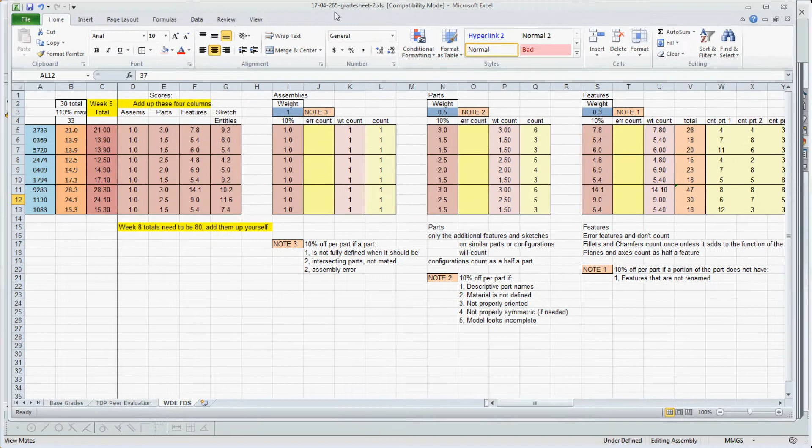So this is the grade sheet. This is what we're going to be looking at. So if you look at the base grades, here are base grades. And what you want to do is go over here to the WDE FDS section in here.

What I'm trying to do is make this as easy as I can, but as fair as I can too. And what I'm grading you on over here in these 4 columns are assemblies, parts, features, and sketch entities.

And for week 5, these are the values you got. And for this week, for week 8's evaluation, we want to make sure we hit 30 points. So some of you are like 2/3 of the way there. You just need to add more stuff. You need to add more assemblies. If you want to do a sub-assembly, if you think it's appropriate, you can do that. Parts, you could add more parts to it, more features. And over here to the right-hand side are sketches.

So I made it so you could actually see these over here. And this column over here is actually just a maximum. So if you exceed like maybe 36 over here, if we already put in for this person's part, he actually had 91 sketch elements in that one part. That actually bumps up quite a bit, so that makes that 36. Capping it off at 10%, so it's 33.

So there's 6 parts. I only counted the first 6 parts in here, and he made a lot of sketch elements in here. And with 6 parts, he was actually able to get that score that we're trying to achieve for this week. With the 6 parts, each one of those parts had 8, 8, 8, 7, 6, and 10 features for each one of these parts.

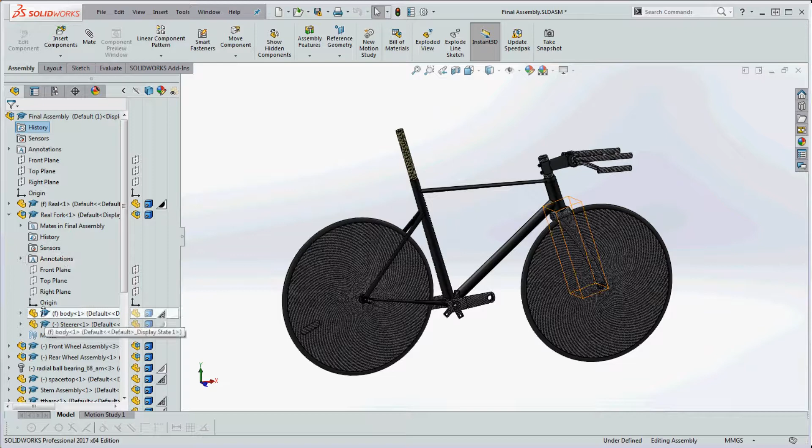We're going to count that as part number 1. We have a sub-assembly right away, but if that were a part, the real fork, we'd count that as the real fork. The real number 2 part is going to be this body and a steerer, as you call it - I suspect there's probably a better word than that. That's going to be part number 2 and 3.

In this other assembly, we have what looks like 1 part, 2 fasteners, and then another part. Fasteners are going to count as half. So we're going to count those, and so on and so forth. That's how parts are counted.

If we go back to the grade sheet and take a look at that, we have our parts over here. Ultimately, we're going to get down to the bottom of our assembly, and we're going to go ahead and count all the parts and put that here.

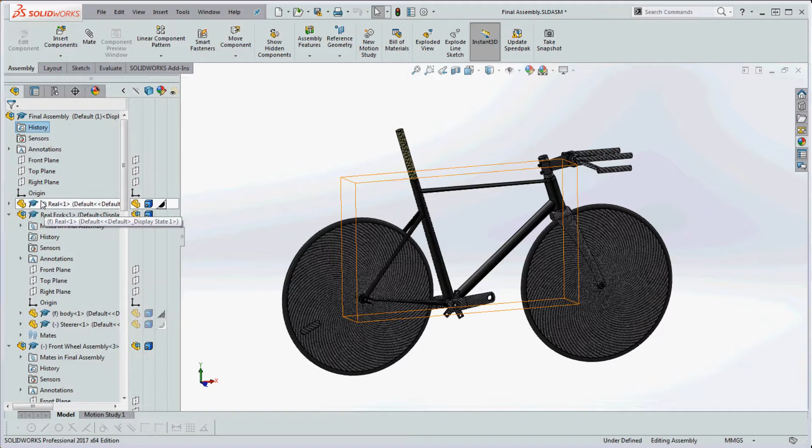So what's next? Next are features. Let's go back to our model and take a look at our features. We're going to dig into this a little bit - maybe take a look at this one over here, our part number 2. Let's open that up, and now we're going to count the features.

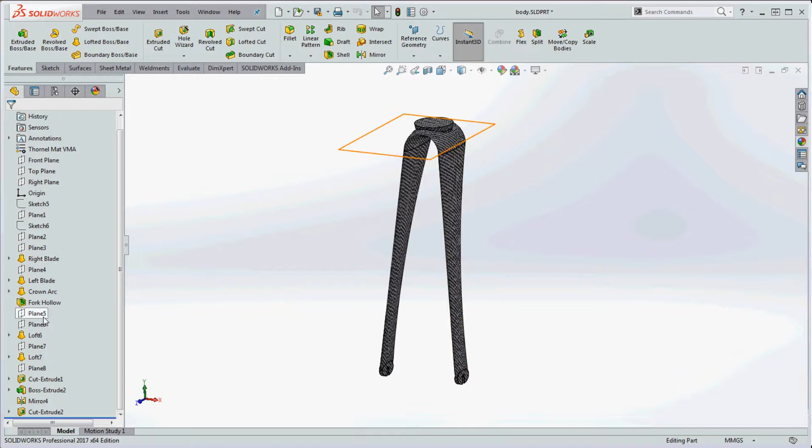We can count the features inside the feature manager tree of the assembly, but this is just as easy too. So we're going to start counting features. After the origin, we're only going to count planes as half, because they're used there as kind of reference geometry. We have 1, 2, 3, 4, 5, 6, 7, 8 planes - that makes 4 features, we're going to divide that by 2. Then we have a right blade, left blade as loft features, and so on and so forth.

So that we have 4, 5, 6, 7, 8, 9, 10, 11, 12, 13, and 14. So we have 14 features for our part number 2.

Now if we had a fillet in here, I'd count that fillet just once. If we had 5 fillets in there, I'd still count those fillets as just 1 fillet. It's real easy to put a bunch of fillets in there thinking you're making progress in your part when you really should be adding more significant features.

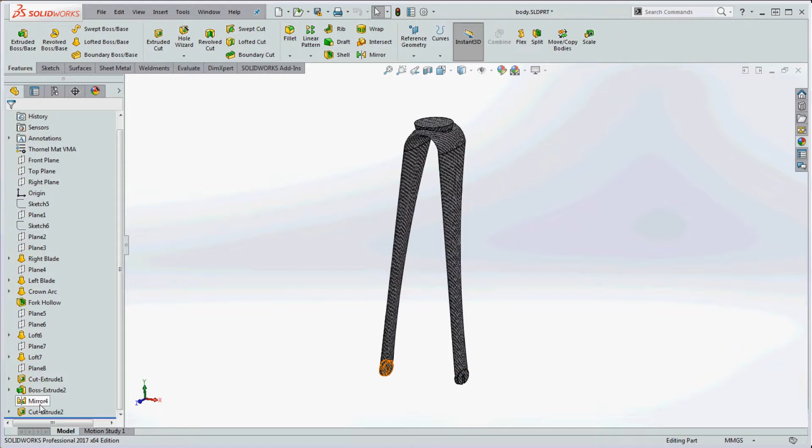So with that said, we have again 4, 5, 6, 7, 8, 9, 10, 11, 12, 13, 14. Kind of lost track of how many parts we actually counted. So here on this person's element over here, for his second part, we're going to type in 14 rather than 20, so it brings the score down a little bit, but it's almost at 30 as it is.

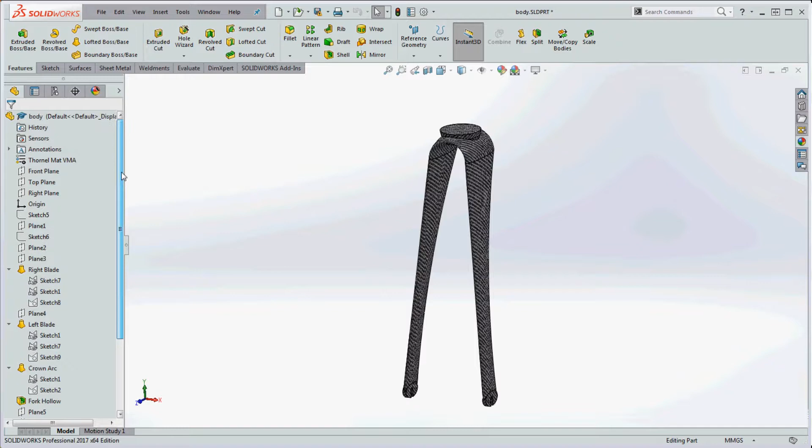Okay, the last thing we want to count are sketches. There are a lot more sketches in your assembly than you have anything else typically. So we're going to take our part number 2 over here and begin to count the sketches. We're going to start up here at the origin.

Looks like we have a couple bits of reference geometry in here - a vertical line and then another line that goes off by maybe 10 degrees. But anyways, we're going to count that. So we have 2 lines in here, that makes 2 sketch elements and 2 dimensions, so that makes 4. I'm just going to go ahead and write that down and count this as we go through our part.

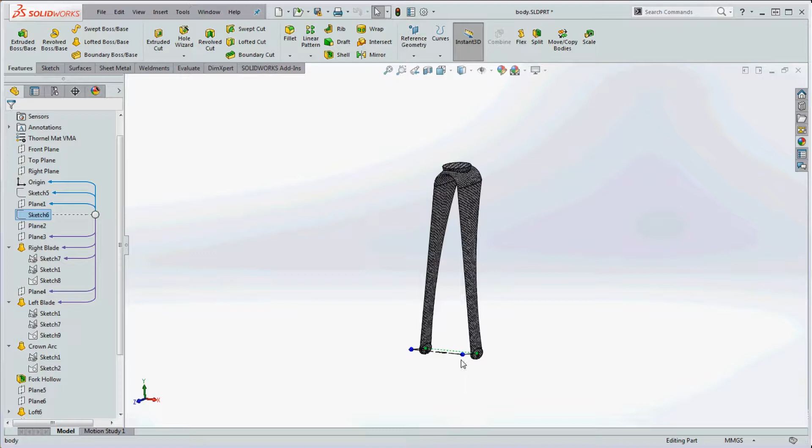Some more reference geometry at the top of our tree - that's really good to have. Looks like 2 more items in there. Go ahead and write that down.

Now we have some lofts in here which are driven by profiles - should be labeled. But anyways, we have sketch 7, sketch 1, sketch 1, and sketch 7 again. So we're doing sketch 1 three times, but we're only going to count sketch 1 once. We're not going to count that 3 different times, even though it appears 3 different times.

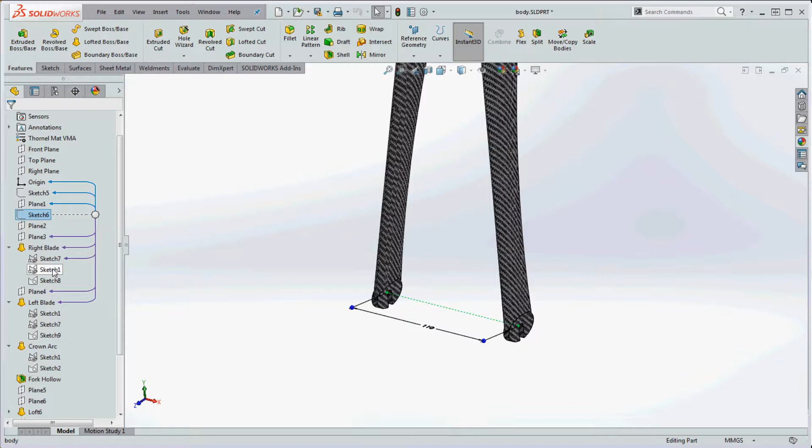So sketch 7 looks like 2 ellipses, a center line, and then we have dimensions - so it's 1, 2, 3, 4, 5. Write that down. Then sketch number 1 has got something similar on the top - we have 1 extra line in here, so that makes 4, 5, 6 with the dimensions. We're going to write that down too, because I'm going to lose track.

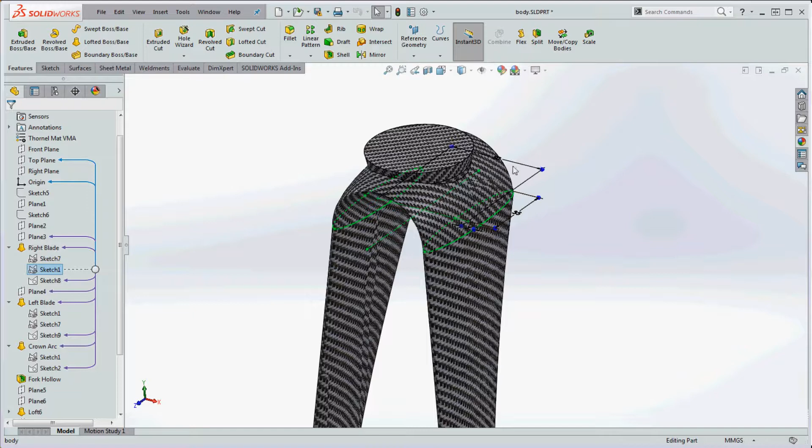And then sketch 8 has got our guide curves, 1 dimension, and then 2 guide curves in there - looks like 3 elements altogether. So now we're not going to count sketch 1 and 7 over here in this feature.

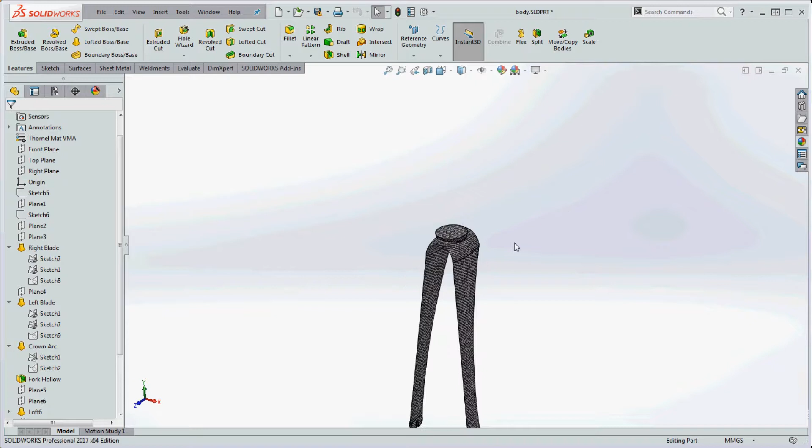We're going to count the guide curves, which is going to be 3 more. And then down here for sketch 2, where we have some more elements in here. It looks like 3 more curves in here, and that adds to the total so far. So those curves didn't have any dimensions on it, so it must have relied on existing geometry. So moving along, our shell feature doesn't have any sketches associated with this.

So now we have sketch 12. There's 2 more there, so that makes 4 more. And it looks like a short line in here to connect those 2, so that makes 5. And then 6 with that one, so we're going to write that down. And so on and so forth. So that's how we do it. We just go from the top to the bottom, and we just add these together.

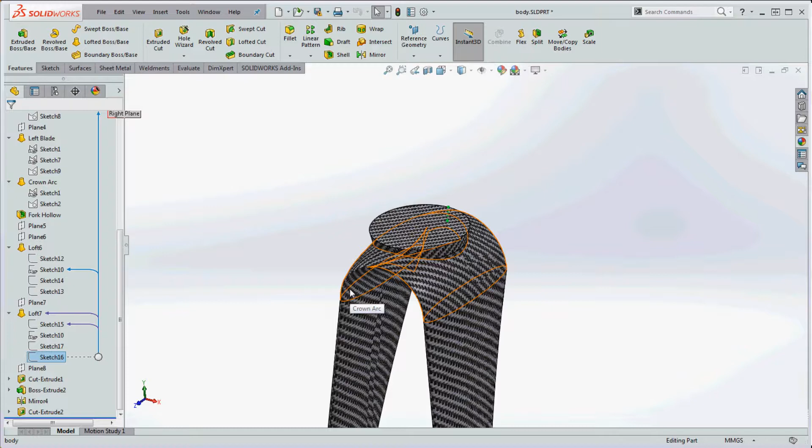So there's 1 loft profile, 2nd loft profile, 2 each makes 4. Another line, that makes 5. Another line over there for a guide curve makes 6. We're going to put that together, and then so on and so forth. So this one's on the bottom. 1, 2, looks like for that. And then let's see what else we have in here. That looks like it's something similar, using the same sketch. Not going to count that.

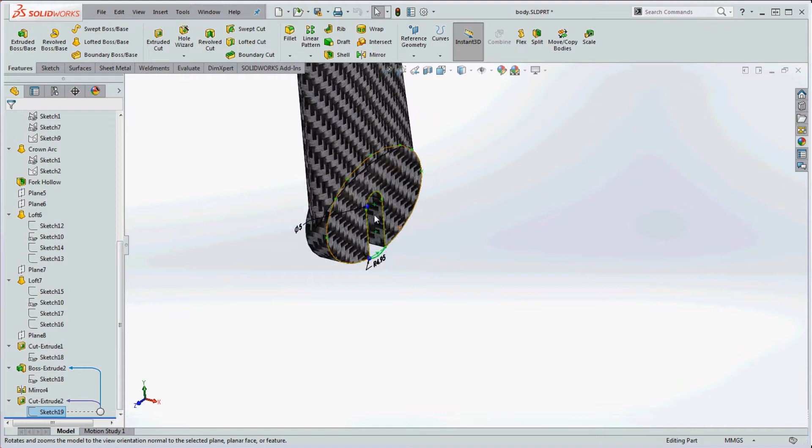And then finally sketch 19 down here. 1, 2. So with the ellipse there's 1. Then there's 2 with those 2 vertical lines and arc on top. That's 3, 4, 1 on the bottom. That makes 5. 2 dimensions makes 6 and 7. So if we add all that together, I'm not going to waste video time for that, but it looks like it's about maybe 25 sketch elements in there.

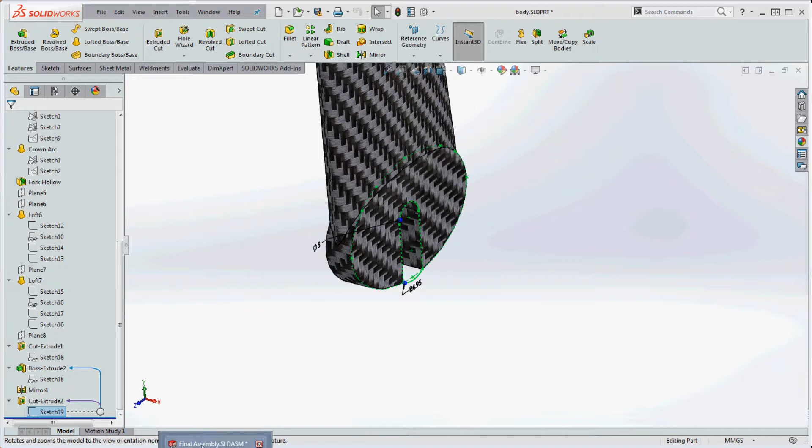Then we go back to our table and we make our corrections. So that's part number 2, and this one we're going to put in 25. So you can see what that is. It bumped the score up to over 30. Didn't quite cap it at 33 yet, but now we're making progress here. So that's how you do it. Whenever you want to see what you can do in order to boost your score, go over here to the light yellow elements, this section over here, and add it in for sketches, features, parts, and assemblies.

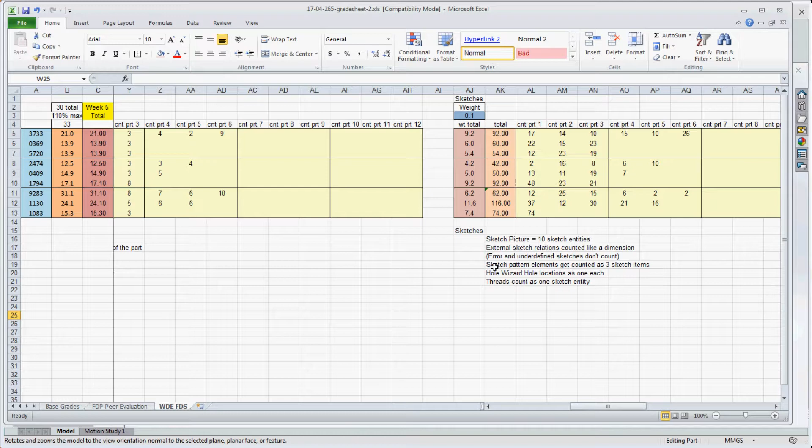Okay, this is the last thing. Last thing you need to consider here are errors. If you're looking at each one of these elements, it gives you guidance of what I'm looking for. I say over here, there's a sketch picture. If you have one, it's going to be worth 10 sketch entities. External sketch relations count like a dimension. And errors and underdefined sketches don't count. You got to keep that in mind. If I see an underdefined sketch, I just go to the next one. So you got to be careful about that. Sketch pattern elements get counted as 3 sketch items. Hole wizard, hole locations, and threads get counted too in a special way.

So features over here, now we have a column which allows us to take off some points. The points I'm taking off are going to be 10%, and the only thing I can find right now are features that are not renamed. You want to make sure you rename those. And it's going to be based on parts. Something else to consider about features in regard to what I'm going to be counting: error features don't count, just like sketches that are underdefined. If there's errors in here, I'm going to just pass over it, not count it, so make sure it's correct. Fillets and chamfers count only once, as I mentioned before. Planes and axes count as half a feature, as long as they're part of the model.

So let's say all 6 of this person's parts, none of them are renamed, so I'm going to go ahead and type in 6 in here, and it's going to take 10% off the 15.9, giving us a value of 14.3. It'll take 5% off if I type in 3, so that means 3 parts are affected by that. So if I see a part that's half named, and let's say all 6 parts are only half named, that would still count as 3.

So I'm not going to ding you for all 6 parts, but kind of like the bulk of it. If it's half for each one of those 6 parts, then it's equivalent to about 3, and I'll put in that value in there. So something very similar for parts too.

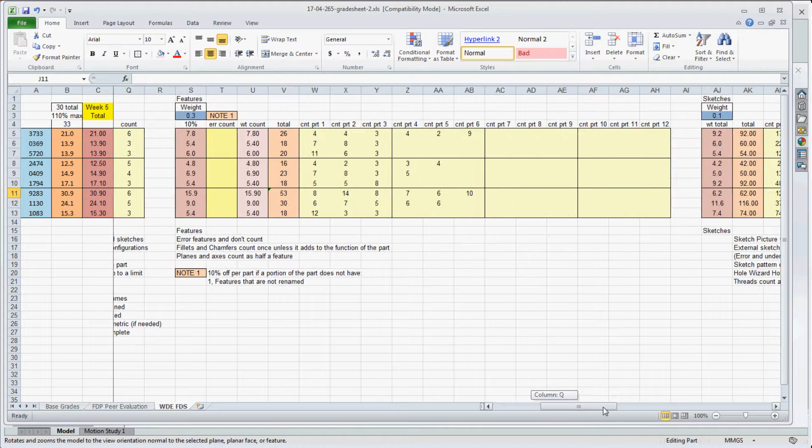So ultimately, once you get these points taken off and added and put together, these are the 4 columns it's looking for. This column over here for the sketches, this column here, the dark pink, it's just going over to that column over there and taking a look at that. So, that actually should be here, not there. So we're going to move that over, and then I'm going to copy that up and down and make sure that gets included.

But essentially, this one's going to be over here. That one's going to be, not there, over here. So let's go ahead and get that corrected. And again, we're going to copy that up. Copy this one up, just so I don't lose track of that. Copy that one down. I'm going to format those cells here in a bit. And then finally, this one over here is going to count all the sketch elements in there.

So once those things are added up, this is almost the ultimate summation here. It's going to add up all 4 of those columns, and then it's going to give you a score of 13.9 for this student. For this student over here, which has a lot more stuff, it's going to be 30.9. And then if it goes over that value, up to 33, it's going to be capped at 110%. So this is the score I'm going to be looking for in week number 8.

These are the scores that are current as of week number 5. So this is what I've seen lately on your final design project. As I added all those together, this is what you have currently on week number 5. Now, 2.5 more weeks have already passed since week 5, so I'm certain you've done more work on this. And you might already be up to 30, which is good. So keep in mind, we're looking for 30, 33 max if you go over 30.